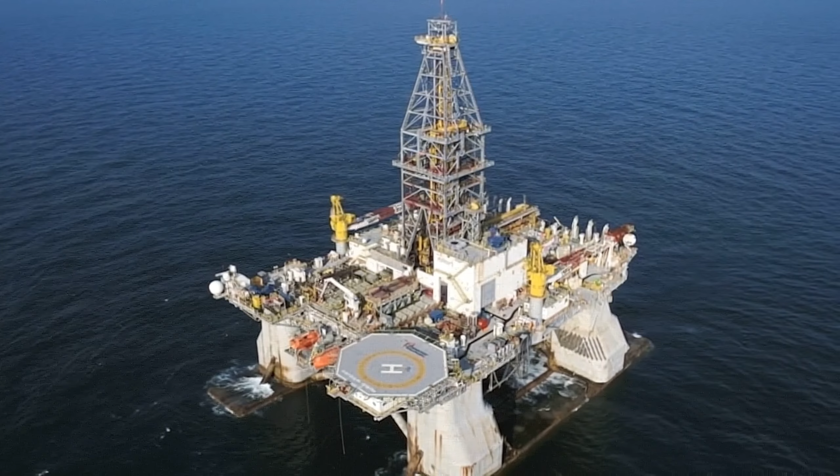Gordon Jones had arrived on the rig just the day before. He spoke to his pregnant wife about 10 minutes before the explosion. His son was born 3 weeks later.

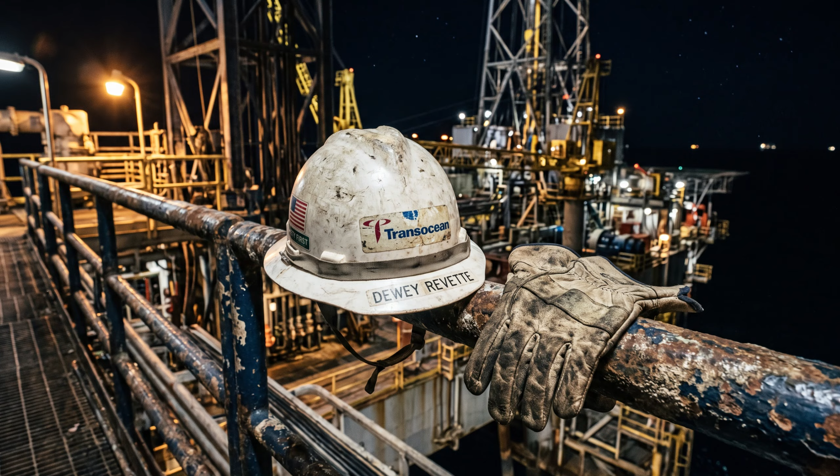Dewey Revette had been a driller for Transocean for 29 years. He was scheduled to fly home the very next morning.

5,000 feet beneath them, resting on the seabed, sat a stack of valves and steel rams as tall as a 5-story building. Somewhere inside it were 2 hardened steel blades built for one absolute purpose: cut through the drill pipe and shut the well if everything above went wrong.

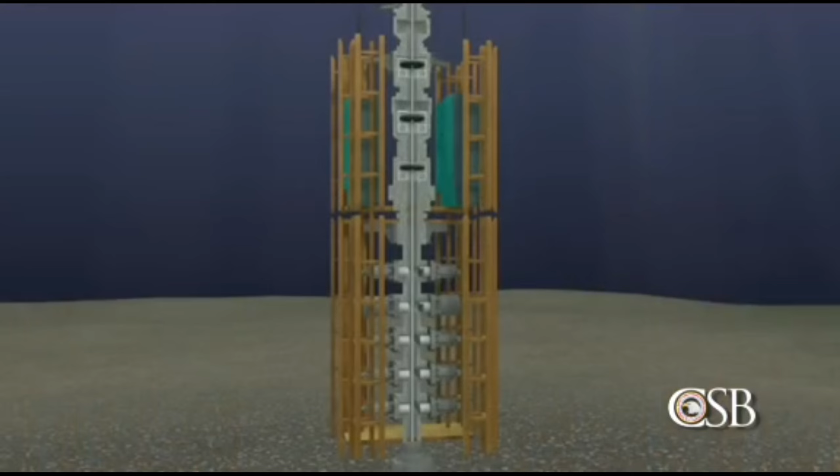Everything above went wrong. Almost every account of that night says those blades never closed. The U.S. Chemical Safety Board, which spent 6 years investigating the wreckage, concluded otherwise. This video is built directly from the board's published report.

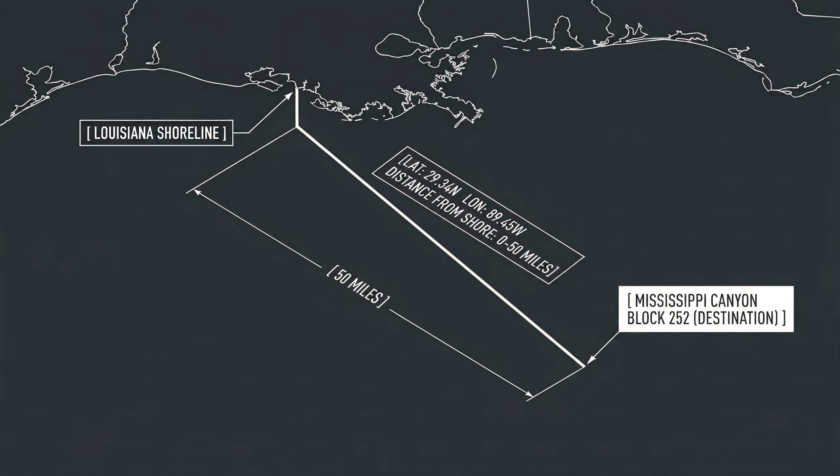Macondo was a well in Mississippi Canyon Block 252, sitting roughly a mile beneath the ocean surface and another 2.5 miles of solid rock. BP was the operator.

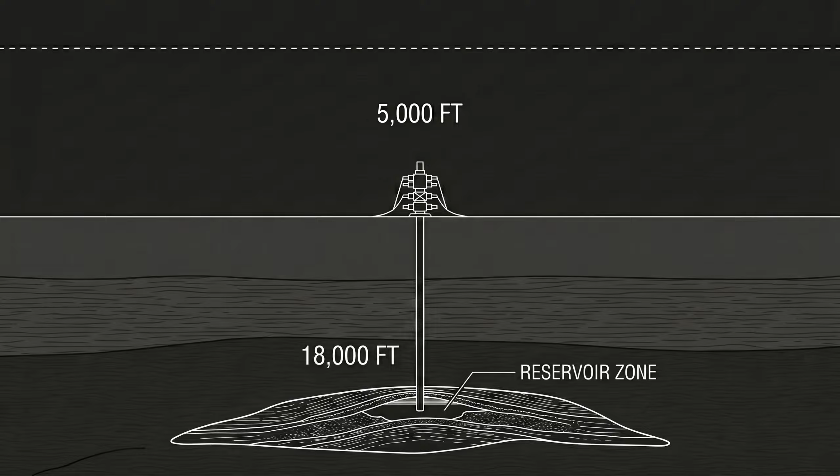BP designed the well and made the calls on how to finish it. Transocean owned the rig and employed most of the crew. Halliburton mixed and pumped the cement. 3 separate companies, 1 hole in the seabed, and a chain of decisions divided among them.

By April 2010, the oil had been found. All that remained was to seal Macondo temporarily and move the rig to its next contract. But that work was running late and running expensive.

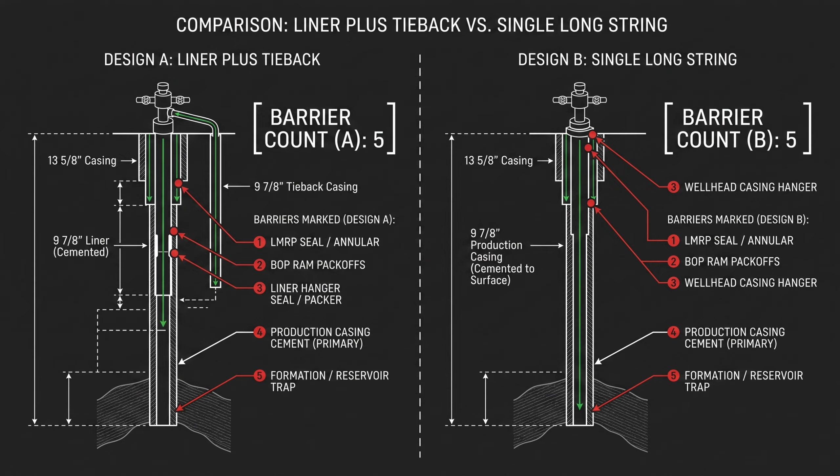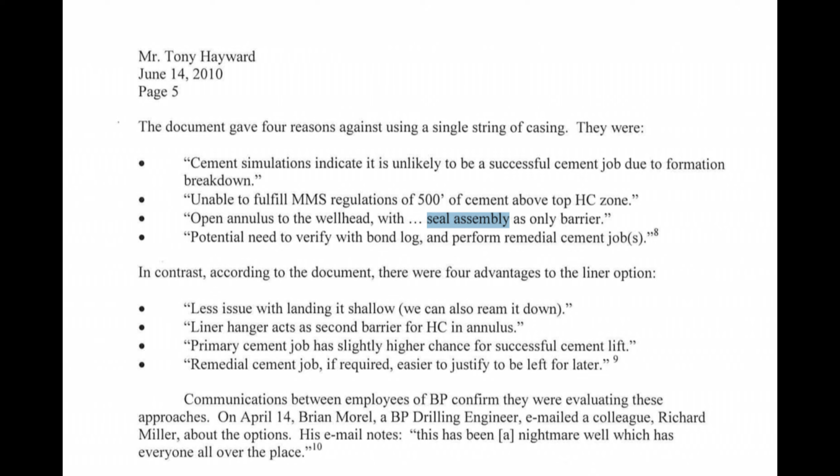Consider 3 specific choices made in the weeks leading up to that night. First, BP could hang a shorter liner and tie it back, giving the well multiple redundant barriers. Or it could run a single continuous string of casing from the seabed all the way to the reservoir. Congressional investigators found that an internal BP review recommended against the single string, warning it would leave the seal assembly at the wellhead as the only barrier if the cement failed. BP ran the single string anyway.

Investigators estimated the cost difference at roughly $7 to $10 million.

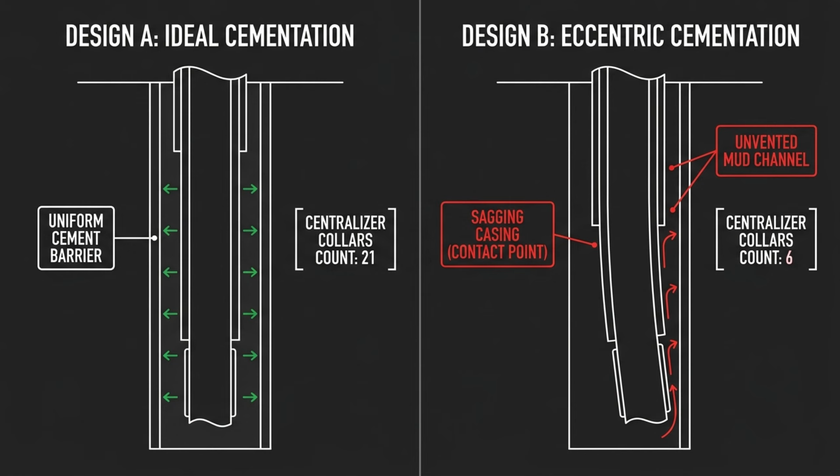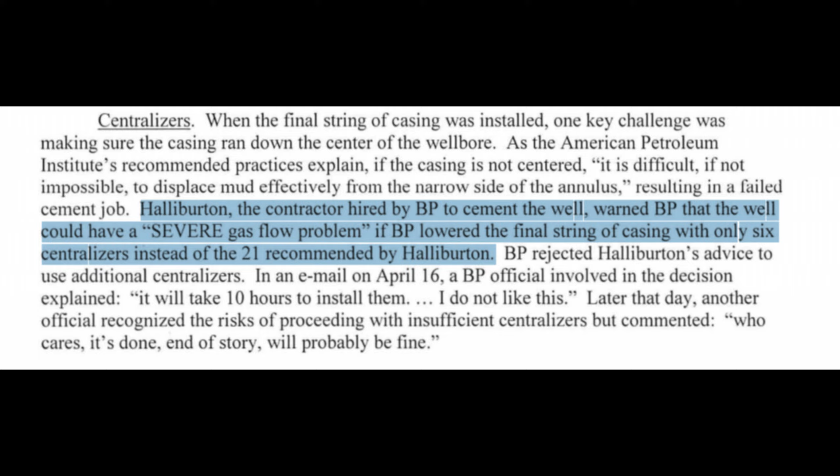Second, the centralizers. These collars hold the casing in the middle of the hole so cement can flow evenly all the way around it. Computer modeling called for 21 centralizers. Only 6 were used. Halliburton warned BP in writing of a severe gas flow risk at that number. A BP employee, in an email later published by a congressional committee, wrote about proceeding anyway.

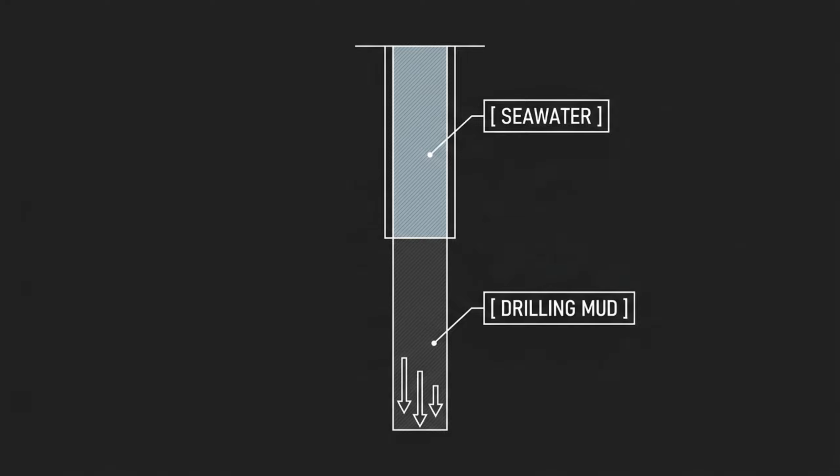There was a physical test that would have shown whether the cement had worked. It is called a cement bond log. It was never run. Late on April 20th, the crew moved to the next step, the negative pressure test.

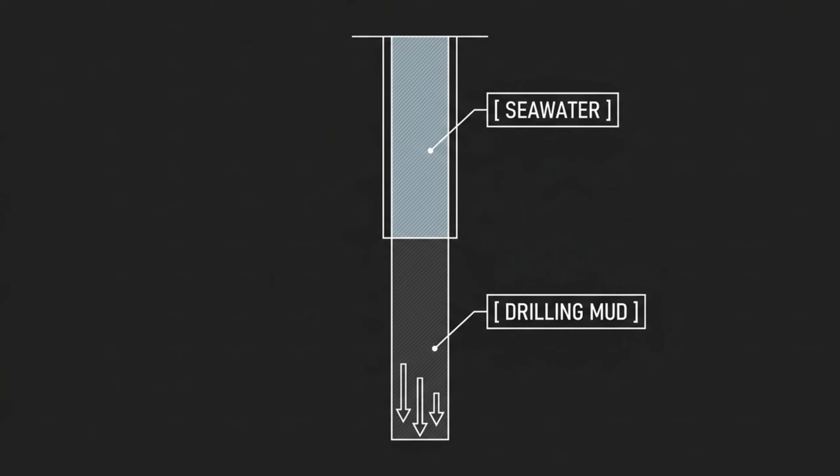The logic behind it is not complicated. Heavy drilling mud in the well presses down on whatever is below. Swap some of that mud for lighter seawater, and the downward push drops away. If the cement underneath is sealing properly, nothing moves. If it has failed, oil and gas start climbing up the pipe.

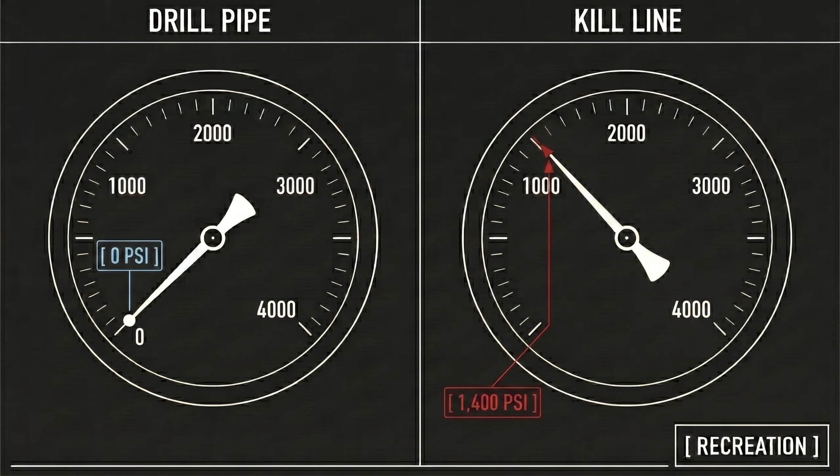2 gauges were watched. The drill pipe read 0, which looked like a pass. The kill line, a separate pipe plumbed into the exact same well, read about 1,400 pounds per square inch. 2 pipes tapping one well cannot disagree. Either an instrument was lying, or something was actively flowing.

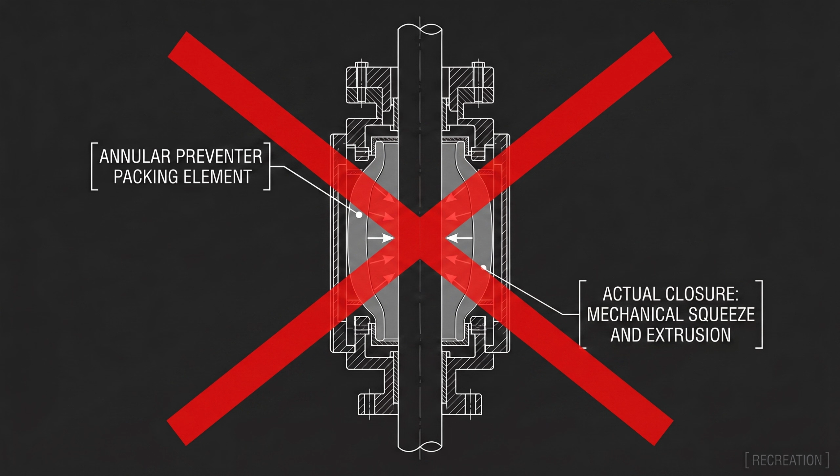An explanation went around the rig that night, often called the bladder effect. It claimed the weight of mud above was squeezing a rubber element in the stack and pushing a false reading onto the kill line gauge. No such phenomenon exists in the physics of the system.

According to reporting at the time, driller Dewey Revette argued directly with a BP supervisor on the drill floor as the test was discussed. Federal prosecutors would later allege that BP's 2 well site leaders botched the test and disregarded abnormally high pressure readings. Those allegations were never tested at trial, for reasons covered shortly.

The test was accepted. Mud kept coming out, seawater kept going in, and the hydrostatic pressure holding the reservoir down came off.

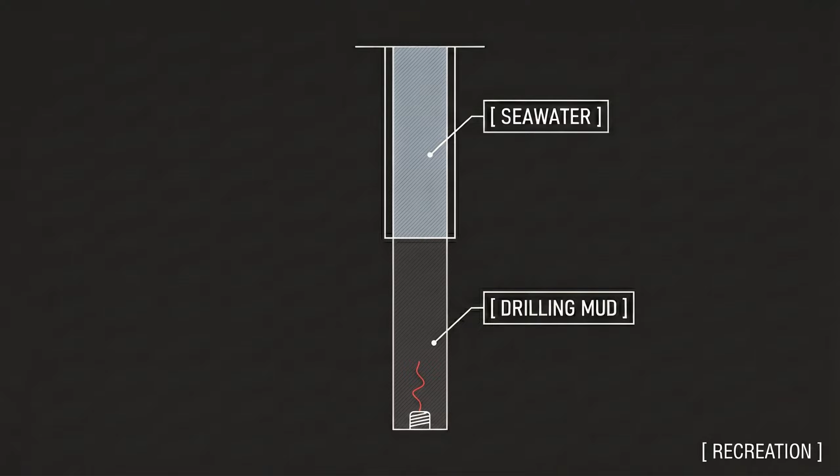Gas began moving up 13,000 feet of pipe, expanding rapidly as it rose. By the time anyone acted, mud was firing over the top of the derrick.

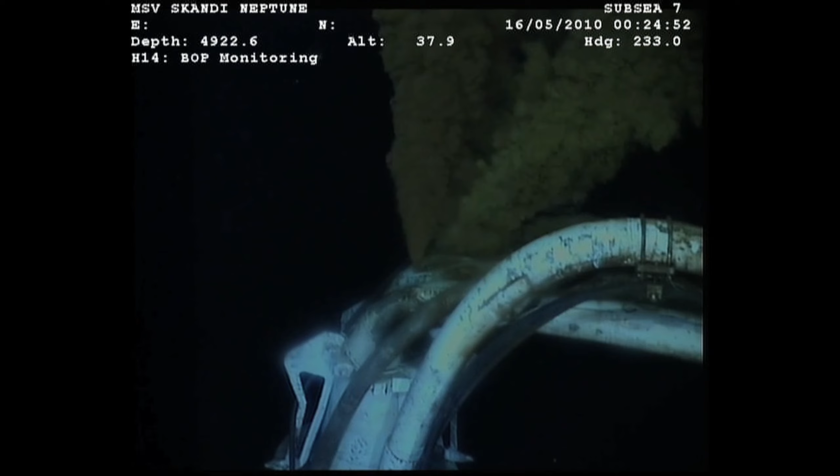The crew closed the annular preventer, a rubber seal designed to grip around the pipe. Hydrocarbons were moving through it fast enough to erode the rubber.

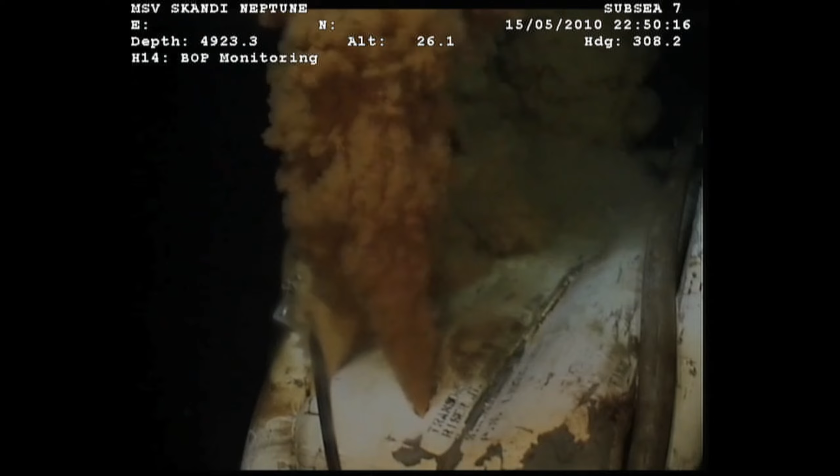Gas reached the engine room air intakes. Diesel engines burn methane easily and cannot be throttled on it.

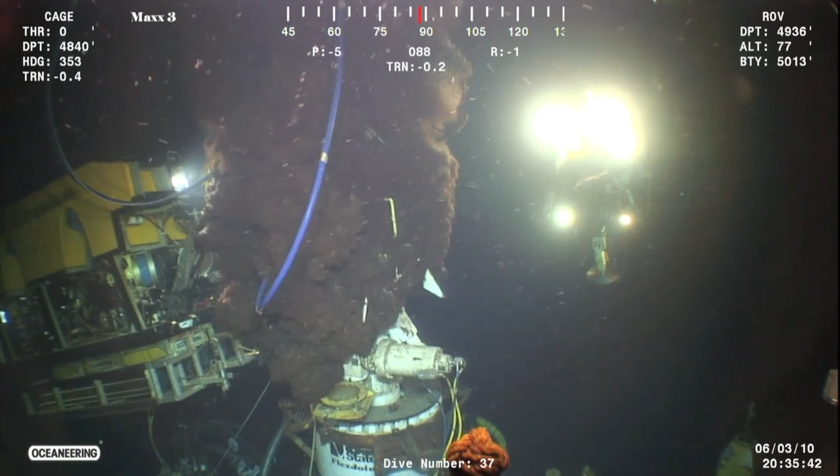They ran away, causing the rig to lose main power in the seconds before the first explosion. Losing power mattered for a reason nobody on board had time to consider. Deep in the blowout preventer sat an automatic system meant to close the well by itself if the connection to the rig was severed. It needed its own electrical and hydraulic supply to function.

The reason the emergency system failed to save the rig is not the reason you have heard. It is documented in an official federal investigation report, and the page will appear on screen shortly.

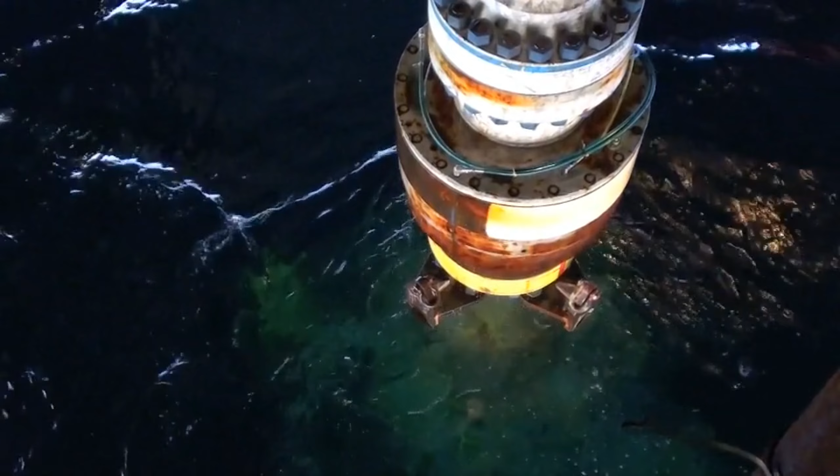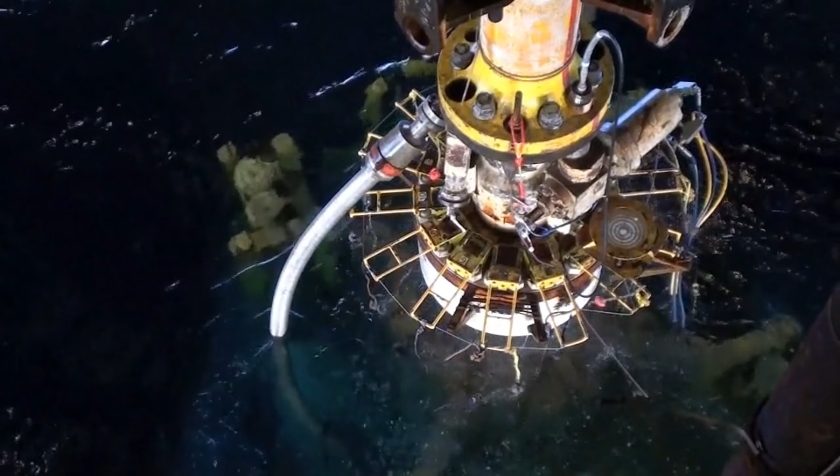The blowout preventer sat on the seabed for nearly 5 months while Macondo flowed unchecked. It was raised in September 2010 and taken under federal control to a NASA facility in Louisiana. DNV, a Norwegian certification body, ran the initial forensic examination and reported in March 2011.

Investigators found bent drill pipe inside the stack and blades that had failed to make a clean cut. DNV concluded the pipe had been pushed off-center, preventing the ram from doing its job. That report shaped nearly everything written about the disaster for years.

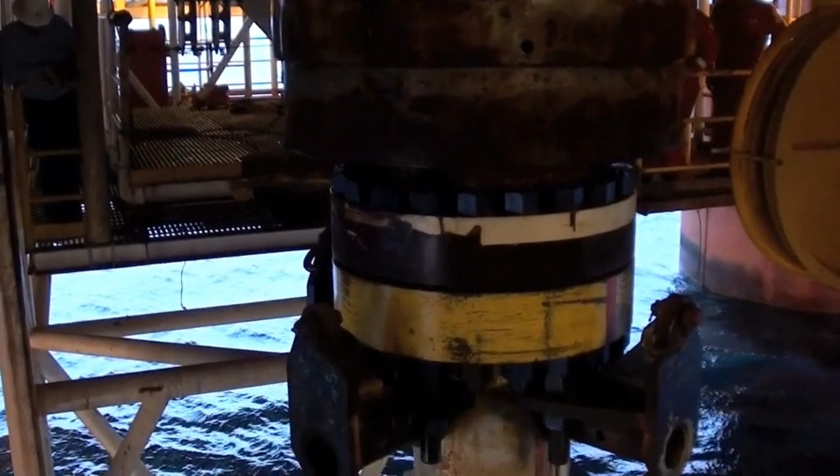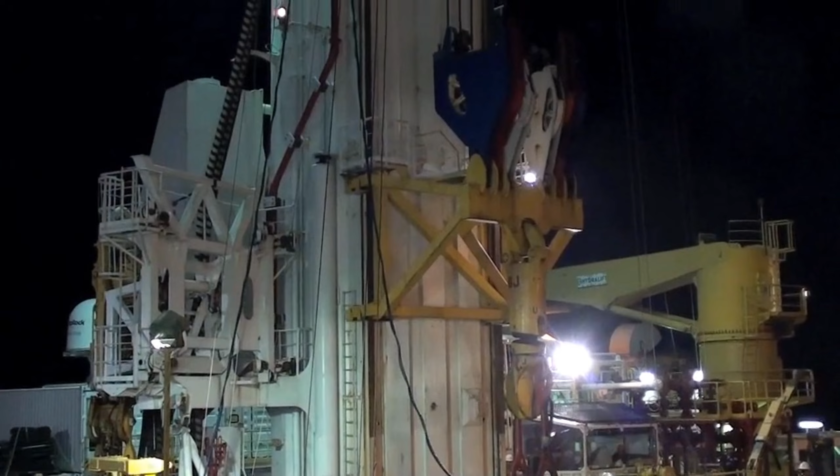Congress then asked the Chemical Safety Board to conduct an independent investigation. The board is a small federal agency with no regulatory authority and no power to issue fines, which is precisely why its findings tend to state facts other bodies avoid. Its investigators tested components individually, re-examined the recovered hardware, and modeled the forces inside the stack minute by minute, rather than accepting the sequence others assumed.

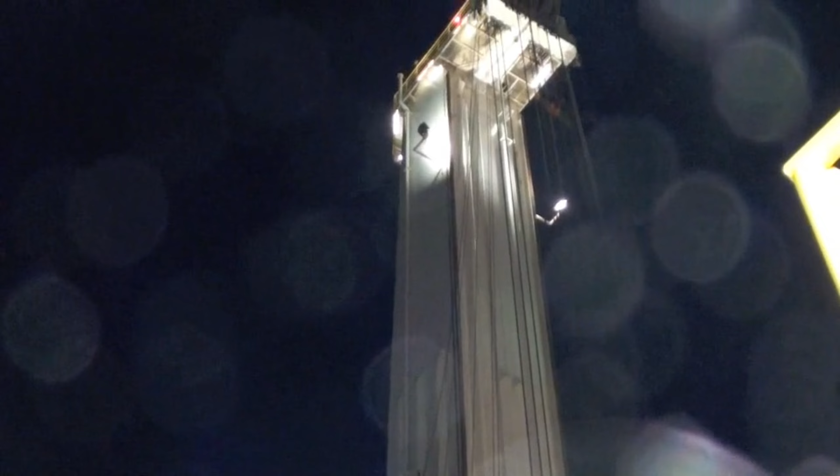Publication came in 2 stages. Volumes 1 and 2 arrived in June 2014, followed by Volumes 3 and 4 in April 2016.

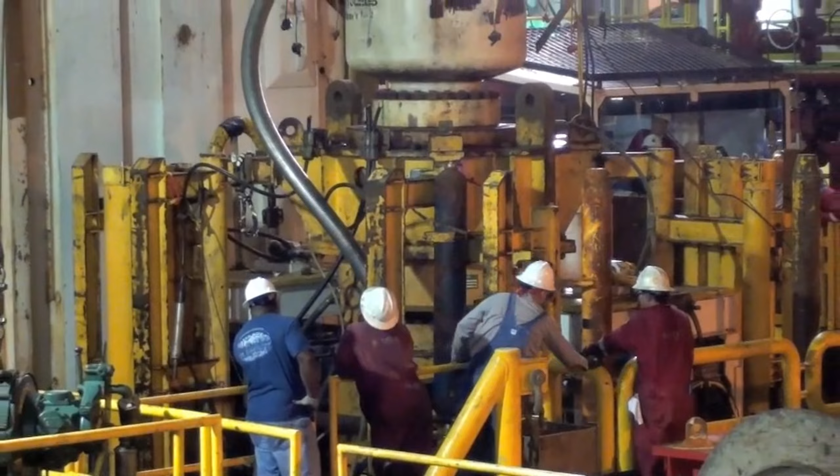Here the 2 examinations part company, and the disagreement is worth sitting with. DNV concluded the shear ram closed on pipe that was already buckled. Board investigators placed the firing much earlier than previously thought, on the night of the explosion itself, with the buckling occurring in the opening minutes rather than days later.

Same wreckage. 2 federal standard forensic reports. Completely different conclusions about what the machine actually did. Volume 2 is the primary document this account rests on.

Dr. Mary Beth Mulcahy oversaw the board's technical analysis. Her summary of the central finding was blunt. She stated that pipe buckling could occur even when a well is shut in and apparently in a safe, stable condition, that a drilling crew would be unlikely to detect it, and that it could render a blowout preventer completely inoperable in an emergency. Robert Kaluza and Donald Vidrine were BP's well site leaders on duty during the pressure test.

Both were indicted in 2012 on manslaughter counts. A judge dismissed the seamen's manslaughter charges in December 2013, holding that an 1838 statute written for shipping accidents was never intended to apply to well site leaders. Prosecutors then dropped the involuntary manslaughter counts, stating they could not prove the case.

Vidrine pleaded guilty to a misdemeanor Clean Water Act violation and received 10 months of probation in April 2016. He died the following year. Kaluza took his remaining charge to trial and was acquitted by a jury.

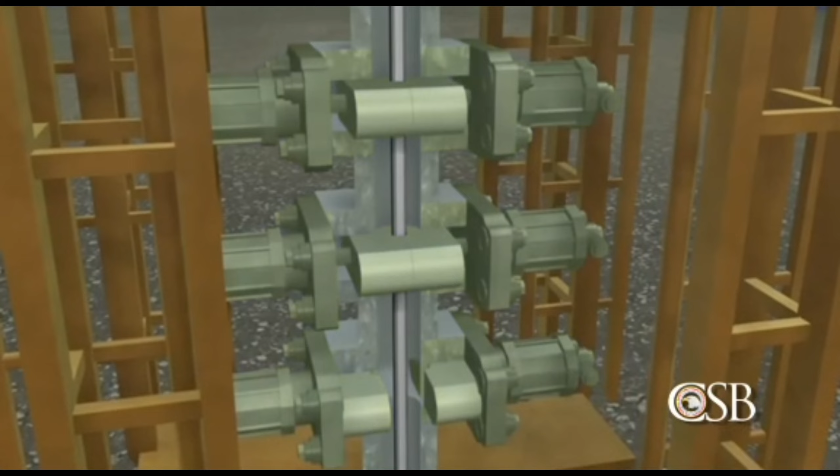The first is that the blades closed. Earlier investigations concluded the blind shear ram either never activated or activated far too late to matter. After testing the components, the board concluded the ram likely did fire on the night of April 20th, days earlier than other reports had placed it.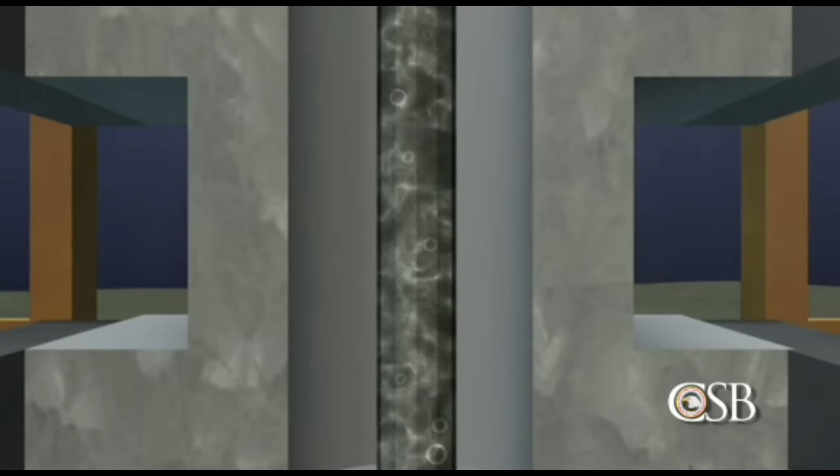The second is that closing made things worse. The board's report states that the ram punctured the buckled off-center pipe, sending large additional volumes of oil and gas surging toward the surface. The final barrier on the seabed operated, failed to seal, and actually increased the flow.

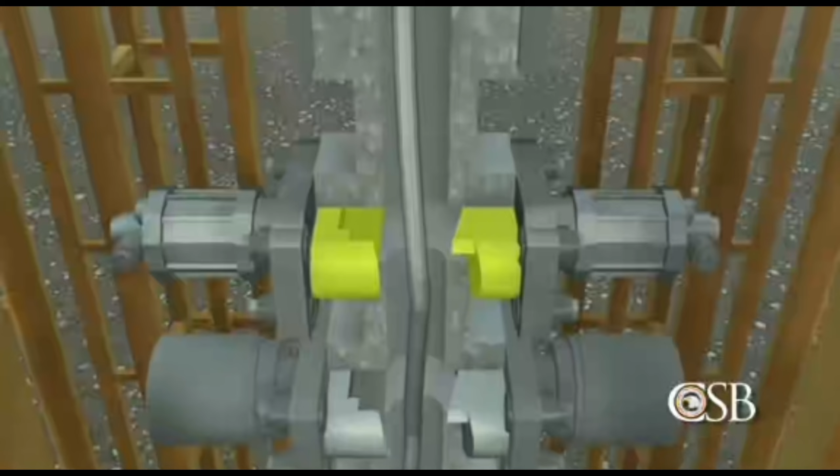The third is the physical mechanism, which the industry had not accounted for. The board named it effective compression. When the pressure inside a pipe differs enormously from the pressure outside it, the pipe can bow sideways even while hanging in tension. It looks stable, but it is not, and it can happen when a well appears shut in and under control, which means the crew fighting to save that rig had no way of knowing the pipe had already moved out of the blade's reach.

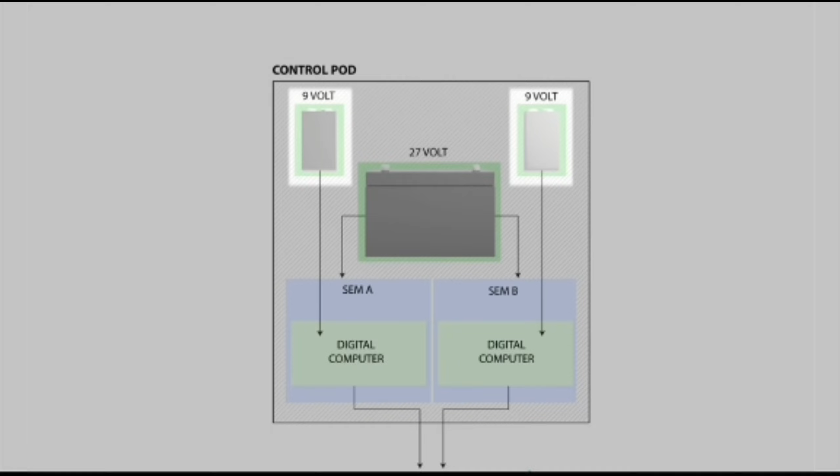The fourth finding is the one that reframes everything. The board recorded that the blowout preventer lacked the capacity to reliably cut and seal the 6 5/8-inch drill pipe used during most of the drilling at Macondo, not because it was bent, not because it was off-center. Even sitting perfectly straight between the blades, that pipe could not be relied on to be cut. For most of the working life of that well, the emergency system on the seabed could not have done the one thing it existed to do.

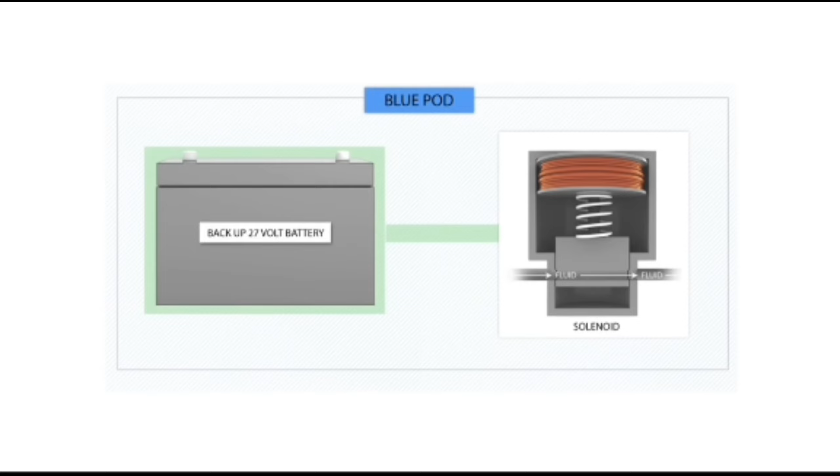Nobody aboard knew, because nobody was ever required to demonstrate it. Two further items belong here. The board documented 2 separate instances of miswiring in the subsea control pods, along with 2 backup battery failures, all of which could have been identified before April 2010.

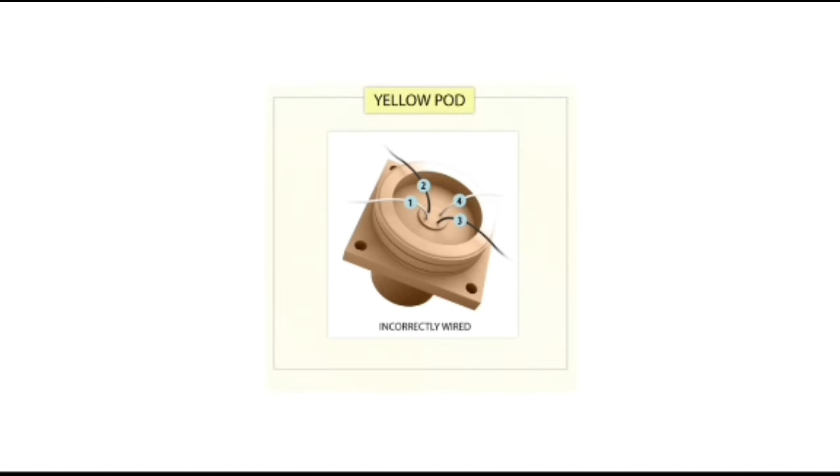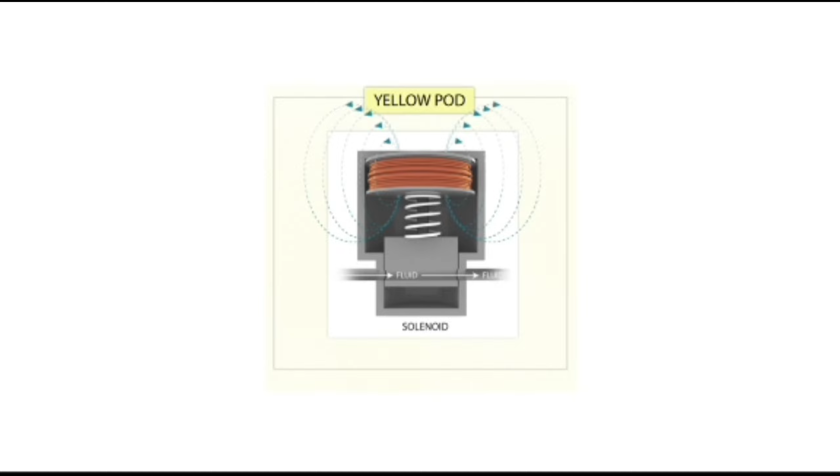Popular accounts mention a flat battery and a faulty valve. The miswiring is missing from them, and in Volume 1, in a footnote, sits a note that the surface cement plug was set at a depth 3 times the maximum then permitted by federal regulation. BP justified this deviation by referencing a piece of equipment called a lockdown sleeve. The National Commission's chief counsel challenged that justification, finding other means were available. A regulator granted the deviation anyway. The reasoning for it was disputed afterwards by another federal body, in a footnote where almost nobody looks.

The board asked the American Petroleum Institute to revise API Standard 53, the industry rulebook for blowout prevention equipment, and to require real testing of the redundant control systems inside a stack. Reaction was mixed. The Institute responded that nothing in the report had not already been dealt with by industry and regulators. BP stated parts of the board's reasoning rested on flawed assumptions.

Yet plenty did change. The Minerals Management Service was dissolved, and the Bureau of Safety and Environmental Enforcement took over drilling oversight. Operators formed the Marine Well Containment Company and pre-staged capping stacks, so a runaway well no longer waits months for equipment to be designed and built.

New blowout preventers carry 2 sets of shear rams instead of 1, positioned to bring wandering pipe back to center before cutting. Onshore centers now watch rig data live, placing a second set of eyes outside the pressure of the drill floor. The board's own verdict on all of that is in Volumes 3 and 4, and it is not celebratory.

Volume 4 concluded the framework remained inadequate for major accident prevention in offshore drilling, and that the Bureau was not fully empowered to accomplish its mission. Volume 3 noted audit findings suggesting some companies used their safety management programs to document compliance rather than to manage risk. It noted that BP's and Transocean's written policies at the time of the blowout would largely have satisfied the newer requirements without ever having been put into practice.

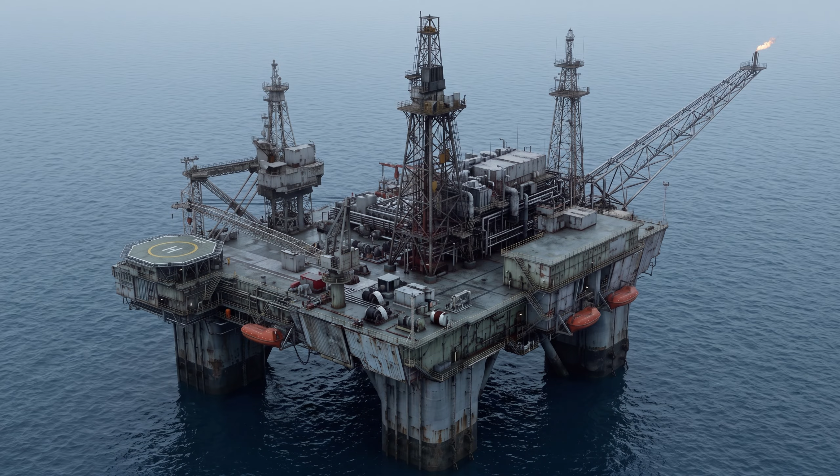Which brings us to a comparison the board draws in its overview. Macondo raised regulatory questions in the United States, much as the Piper Alpha disaster raised them in Britain in 1988. Piper Alpha killed 167 men in the North Sea. Lord Cullen's public inquiry reported in 1990, and Britain rebuilt its offshore regime around a requirement called the safety case. Before an installation operates, the operator has to write down its major hazards, show how each one is controlled, and submit that to a regulator who can reject it.

The burden sits with the company to prove safety, rather than with an inspector to catch a breach. The United States watched that happen. 22 years later, no equivalent requirement existed in the Gulf of Mexico.

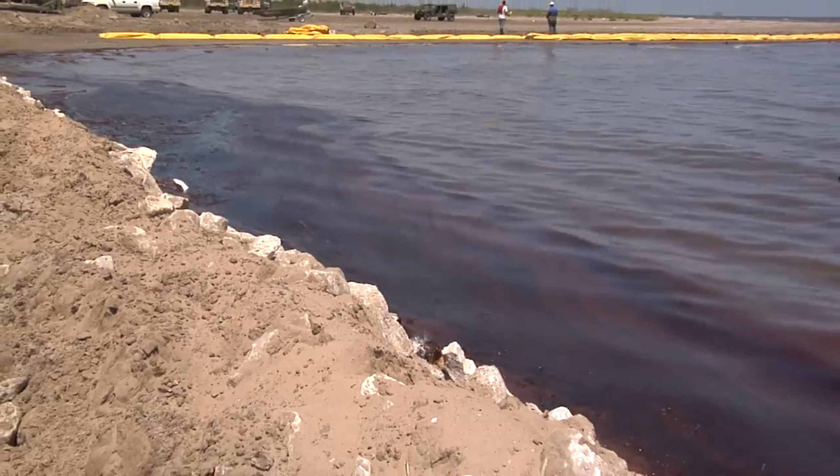A backup that has never been tested against the conditions it exists for is not a backup. It is an assumption, and an assumption is invisible. Nobody argues about it, nobody budgets for it, and nobody stands on a drill floor at midnight and wonders whether it is true. It simply sits there being believed by everyone whose life depends on it, until the night it is finally asked to work.

11 names opened this video. Not one of them ever knew about the 4th finding.